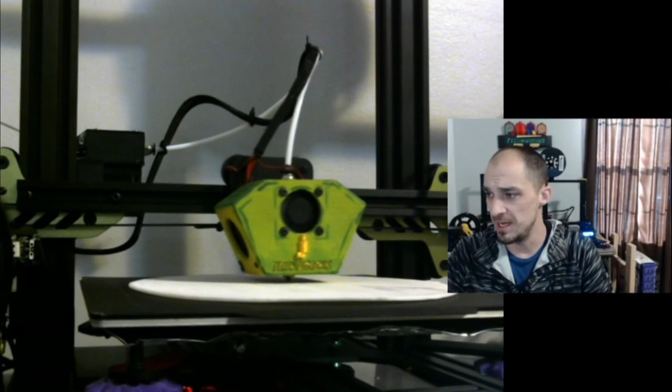As you can see, it is going back and forth. The bed is moving front to back. Then this bar that the X gantry sits on going across will raise up and down, and that is your Z-axis. So 3 directions of motion, actually 6, because it goes both ways in most directions.

The build volume is what they refer to as the size of what your printer is capable of printing. Both of these will print 230 millimeters wide by 230 millimeters deep, which is about 9 inches, and they go about 250 millimeters high.

But first, before you can print a model, you have to either find a model or make a model. There are several places online where you can procure pre-made, ready-to-go models, and I will show you that in a few minutes.

But for now, I want to show you a couple of programs that are free to use to make your own model. The first of those is going to be Blender.

Blender is 3D animation software. It can be used to make any model that you choose. It's got a very good sculpting engine, so you can go ahead and brush and sculpt the object that you want from primitive objects.

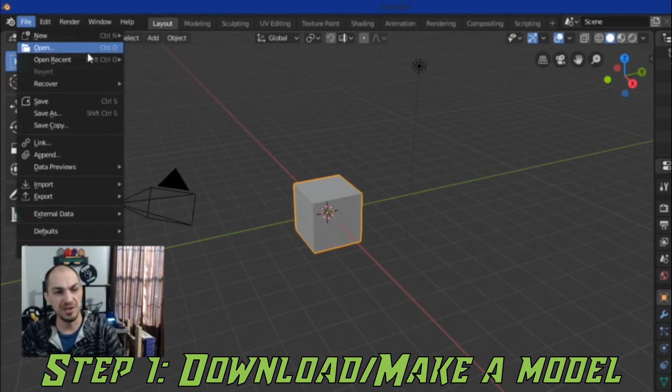I'm going to open something that I sculpted here, and we'll just take a look at it. Now, this is for a game, and as you can see, it is untextured. It's still in the sculpture texture here. The material is just kind of plain, but this could easily be 3D printed.

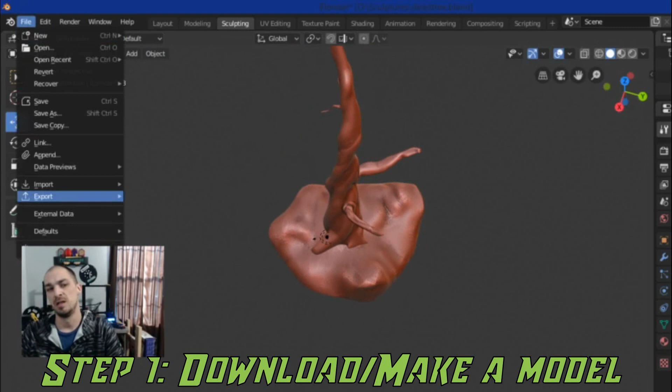The way that I would 3D print a model from Blender would be to go to File, then Export, then STL. I can then save it under whatever name I want in whatever folder I want, and then retrieve it later in my slicer. I'm not going to save this one.

I have plenty of STLs we can import when we get to the slicing stage. But remember that STL is your main file type for 3D printing.

The next step of the process is slicing, and a slicer will take the STL and turn it into something called G-code, which is what your printer actually reads and will tell your printer what to print.

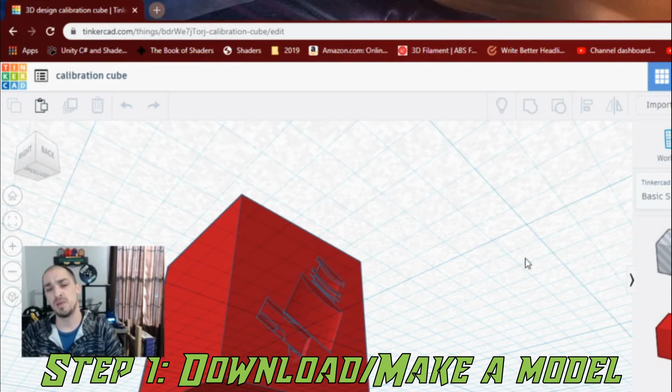Other free programs for making models: this is tinkercad.com, an online app. It works really well for a CAD program. It doesn't really have a sculpt function, so it's hard to make organic looking creations in Tinkercad.

But anything that is mechanical or has to have fitting parts or part accuracy, this is a great little program for it, and it is a great place to start.

If you try Tinkercad and decide that you like this CAD program and want to go in more of a CAD direction instead of a sculpting direction, a couple other programs I can recommend are Fusion 360, which you can get a free license for as long as you're not using it commercially. That also needs an online connection to work, but it works amazingly.

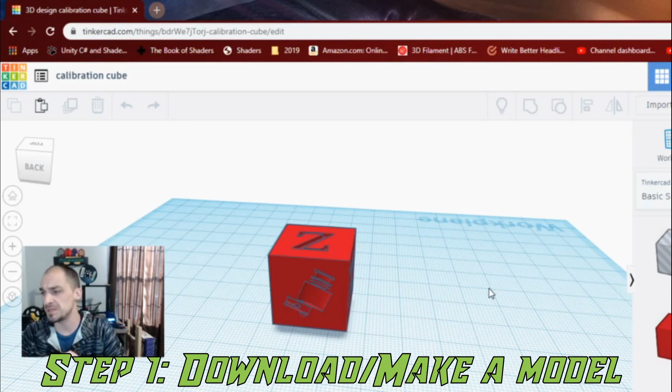Or you have SolidWorks. SolidWorks is not free. You do have to pay for it, but it does run offline, and it is also a very strong piece of software.

On the other hand, we have pre-made models that you can download. This is definitely not the only site, and it crashes a lot. There are a lot of complaints about this site, but it is one of the largest repositories of 3D models, and I can tell you for me, it works 95% of the time. I haven't really had any issues with it. It is probably the most recommended model repository at the moment, although there are a few that are gaining popularity, and hopefully will pass it up this year.

When you download it, it will come with a zipped up file that has your model in it, and it will come with the STL file zipped in that file. Usually there is a README file as well that will tell you what parameters to set in your slicer to get an accurate print, such as layer height and whether or not you should use support.

So I do have a couple things downloaded from Thingiverse, and this is the route that we're going to go because it does have that README file, and I'm going to explain that to you as we walk through the slicer. But first, let's go over a couple of slicer options because there are quite a few, and some of them stand out more than others.

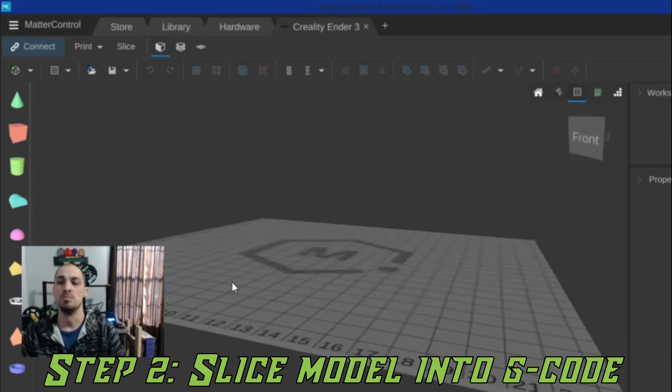The first one I want to show you is going to be my personal favorite. This one doesn't get used as much as two of the others I will show you in a little bit, but it is an awesome slicer. All of these slicers are free, by the way.

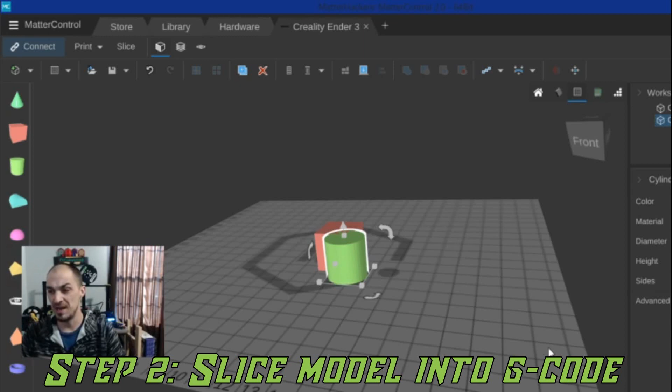So this is MatterControl. This is my favorite. I like it a lot. It works really well. It has this Tinkercad-like building interface in it where you can also build models right in here. So it's a great place to start. Unfortunately, there are more popular slicers and therefore easier to use and better supported slicers. So we will check out a couple of those.

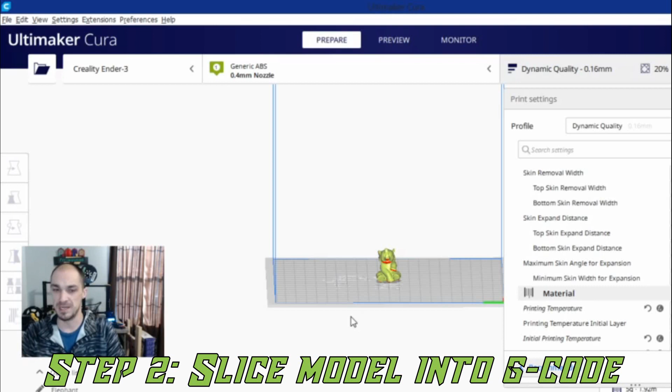Now this is Cura. This is probably one of the two most popular slicers that you can get. It works very well. They're constantly updating it, although when they put out updates, they do tend to have a couple bugs in them, which they fix in the next update. So it's kind of good that they roll through updates pretty quickly. But you can see it looks fairly similar to the Creality slicer. The only difference being the Creality slicer is built on an older version of this Cura engine.

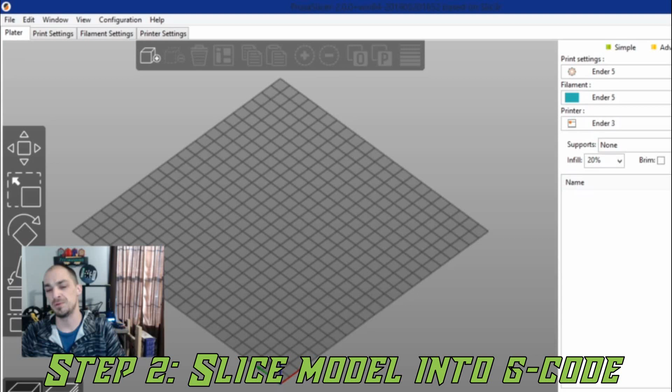So we'll get back to Cura in just a second because this is the slicer we're going to be using. But I wanted to show you the other most popular slicer, and that is Prusa Slicer. This one is a very nice slicer as well. It is made specifically for Prusa printers, but you can use it with pretty much any FDM machine.

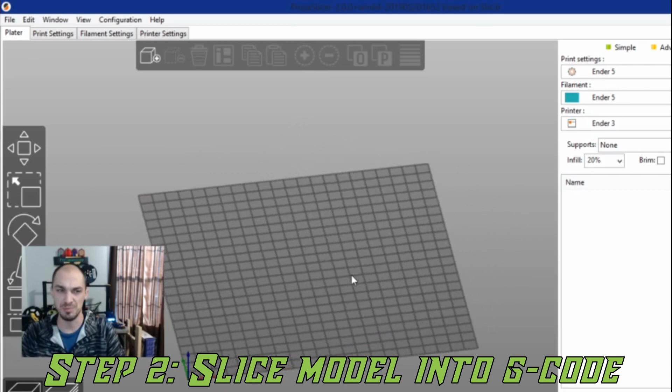And the people that use this swear by it. I have used it a couple times. I've had some pretty good luck. There were some things I didn't like about it. I keep it around because I like to keep things updated and review new features, but it is not my go-to slicer. This is the one that came with my newest printer, the Tevo Tarantula Pro.

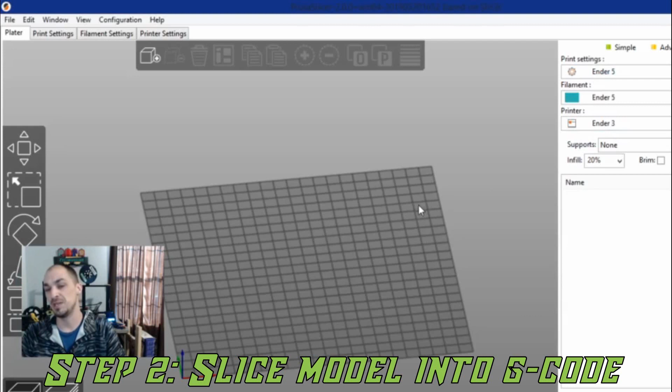Now, these are all slicers that are installed on my computer. So I can slice with Cura, or Slic3r Prusa Edition. Now the reason there's two of these is because this slicer I showed you is actually a different version of a slicer that's just called Slic3r. They branched off. They've basically made their own development of it. They have their own version that they update, and it is different now, but it is based on that same slicer engine. Those three being the main three engines that run pretty much all the slicers.

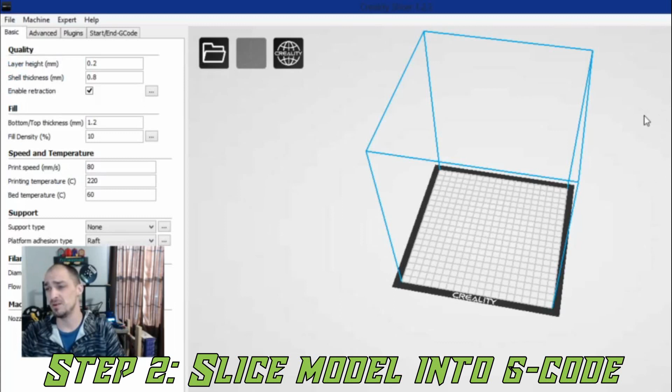There's really no point in using a slicer like Creality slicer, as it's basically a port of Cura and doesn't have all of the stuff that Cura has, so we can close that.

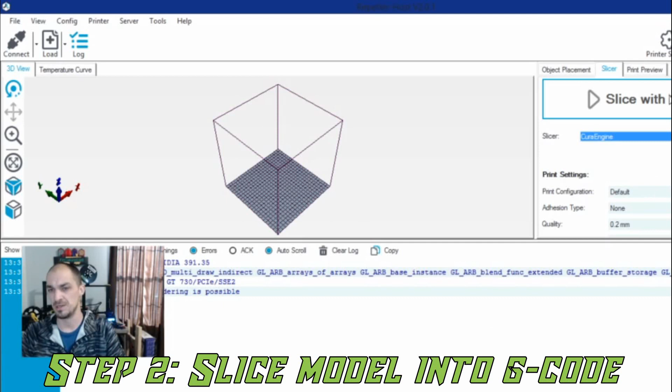Repetier is nice as well if you want to try slicing with the Cura engine or the Prusa engine and compare the models, but this one also is kind of pointless because in here you don't have nearly the amount of settings that you have if you were to just use either Cura or Prusa slicer. So we're going to get more functionality by using one or the other.

Although I will say, the one thing I like the most about this is the manual controls. You can go in here, and most slicers have this, but I just like the way this one's set up, because in Cura, if you send a G-code command, you don't get a return. But here you'll get a return. It'll show up down here. So we can close that as well.

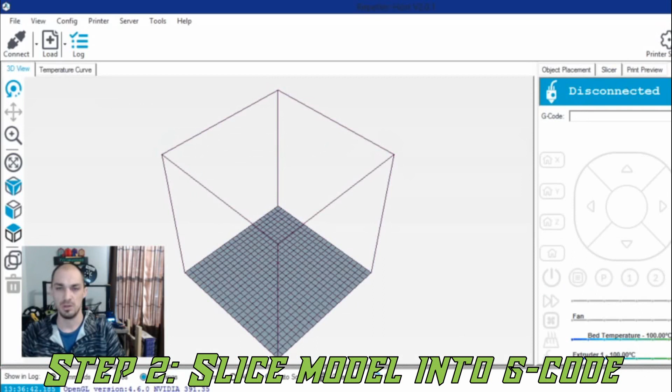And we're not going to be using Prusa slicer either, so we'll close that. I'm going to bring Matter Control up one more time to close, just so I'm not running 20 different slicers. We are going to be using Cura here.

And I have one more free software I want to show you while we were talking about connecting to the printer. This is Pronterface. This program connects directly to your printer, just like the other ones do. But it is a really robust program for sending commands to and from your printer. We'll get into this more in depth later. You don't need to send commands to your printer in most cases, but it's something you use for adjusting settings in the firmware and things like that when you get into more advanced use.

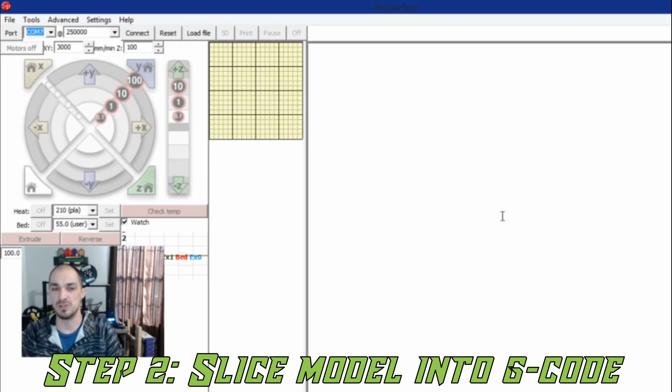The other thing is this slicer here. There is an actual slicer. I can pull a model in, and if I go to slice it, it will open Slic3r, not Prusa Slicer, the original Slic3r, the latest version of it. So it's kind of like Prusa Slicer, but a different branch. Anyway,

That's a lot to throw at you. The reason we're coming back to Cura is because, like I said, Cura is probably the most popular slicer. It is one of the simplest to use. It is the most often updated and has a very good community support system, as well as a lot of online resources for how to use it.

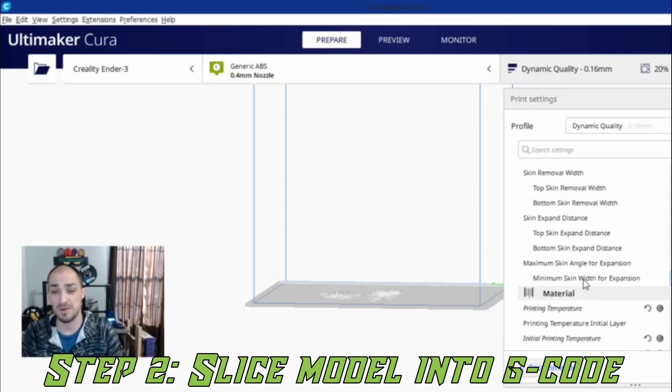But for now, we're going to move on and show you how to import your first model.

And there we go. It's kind of nice. You can just drag and drop. So your screen should look something like this. If you don't have Cura set up yet, I do have a tutorial on how to set it up. Go ahead and check that out and come back to finish this video.

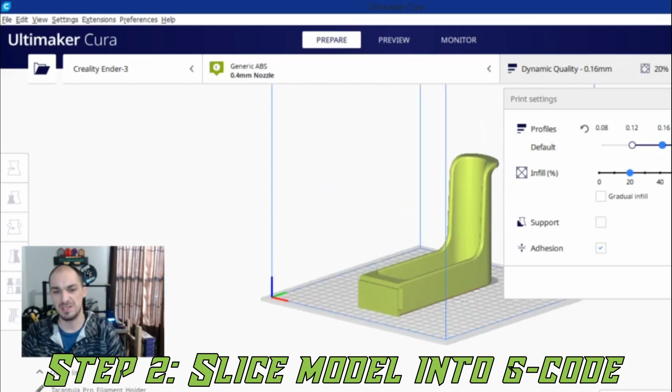But if you're just watching this as far as seeing whether or not you want to get into 3D printing, don't let me overcomplicate things. This is a lot simpler than it looks. I basically just drag and drop. As you can see, it's got this red spot here. That's going to want support. So I would click the support button.

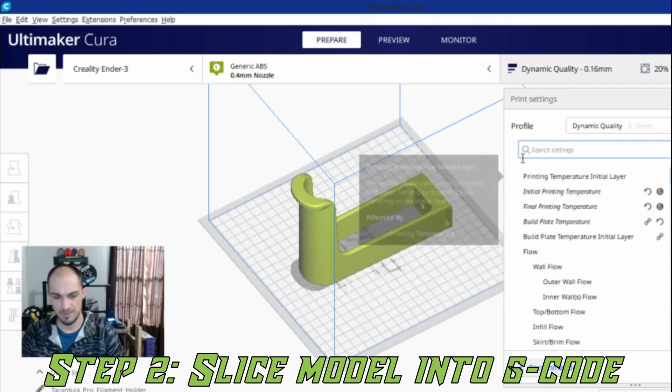You can see I have a few of my settings set here. And I'm actually going to go into my custom settings and do a little moving of things around. I know I had been printing at a different temperature and I want to change that. There we go, we're going to do 220.

And we're going to change the adhesion as well. If you're not familiar with adhesion, like I said, it's in that Cura video for how to set up Cura. We'll worry about that another time, but we are going to be using the brim.

And now we can go ahead and hit slice. Now the program is going to take care of all the hard work of going through and basically making a connect-the-dot map of the individual layers of this model. That's why it's called slicing. It's going to slice it into flat sheets, and then make the machine code to tell the printer where to connect those dots in each layer. Then it raises up to the next layer and puts down that layer, building the model this way. This is called fused deposition modeling—depositing and fusing those deposits into a model. That's where it gets its name.

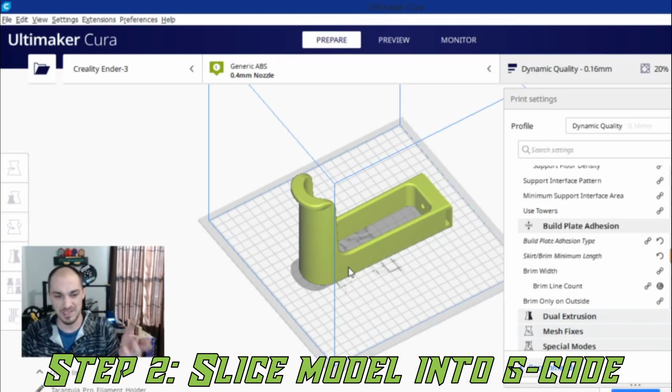So slicing is taking a little bit longer than it normally does. This is a decent sized model, so we're not going to rush it. Once this part of the process is complete, you can save your file, and it's no longer an STL file—it's a G-code file. That G-code file can either be sent directly from your slicer to the printer, or stored on an SD or micro SD card, depending on which printer you have, and inserted into the slot. Once you've inserted the card, you can select that model and print it from the printer, and I'll show you how to do that as soon as we're done slicing here.

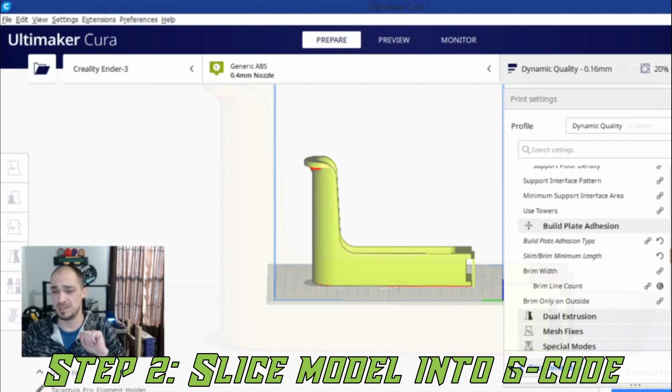Now that I've got my model all sliced up here, I'm going to save it to file, but let's go ahead and check out the preview mode.

This is basically going to show you—if I go all the way down to the bottom, it's going to show you this is the first layer, okay? Now the first layer is basically your most important layer. If this adheres to the bed and goes down well, you're going to have a decent print. If it doesn't stick, the rest of your model is not going to come out.

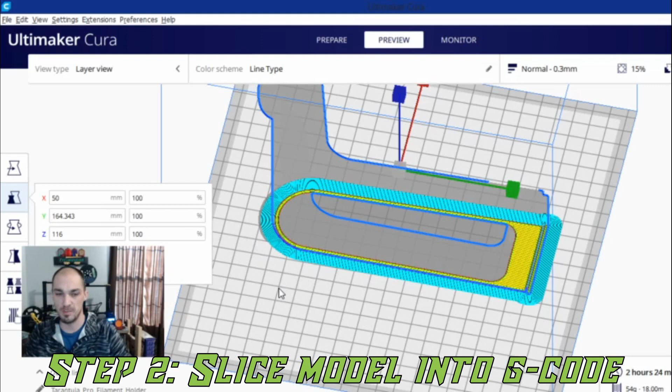As I said though, you can see here a better idea of what I mean by layers. It's breaking it down into each layer, and each layer has a machine path that tells the head of the printer to run. So as it's printing my brim here, this is the path it's putting into G-code to send to the machine. You can see it just kind of goes around and fills out the dots and builds the model up from there. So we'll go ahead and save this and jump over to the printer.

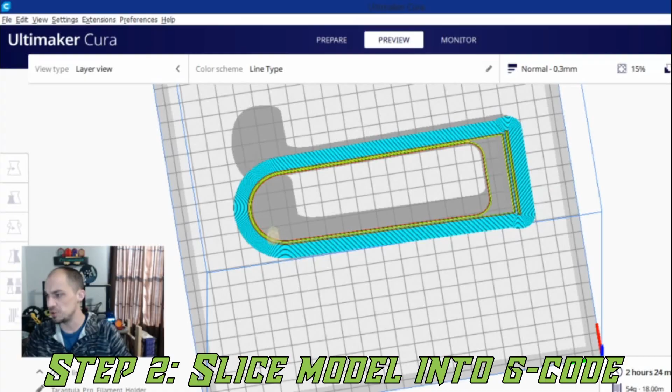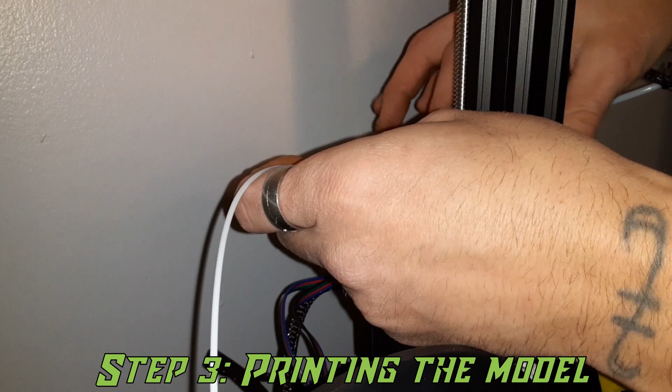Alright, so I'm getting ready to print my first model. I have my spool of filament here, and I'm going to go ahead and just clip the end of it at about a 45-degree angle there. Then there's a little guide hole in the back of the extruder, and I'm going to feed it in there and depress the lever to give me enough room to slide through into the Bowden tube. You're going to hold the lever down, feed as much filament into the Bowden tube as you can. You'll start to feel resistance once it reaches the end, and you are loaded and ready to go.

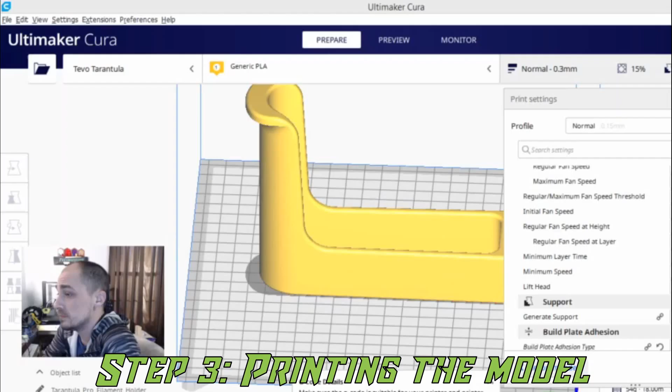Now that I've got my file saved, I'm going to head over to my printer here. As you can see, I have my SD card here. This is a full-size SD card. It's going to go in this slot right here.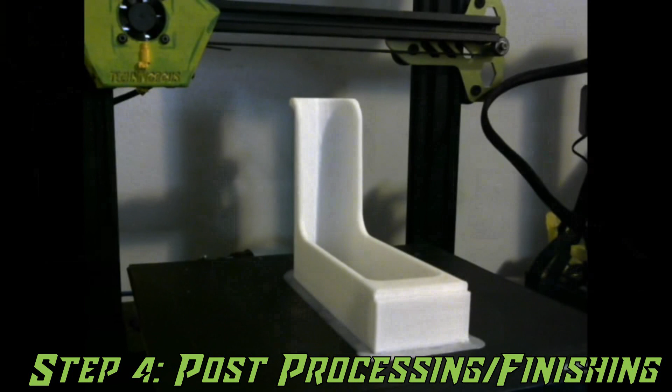Alright, so here we have our finished model. I'm going to go ahead and gently remove it from the build plate. I have a magnetic bed, so I can simply lift my magnet up, and I'll show you that now. Then peel it away from the bottom of the brim and let it slap back down there. And here you see I have the completed spool holder.

Now, the last step to this process is the post-processing and finishing process. There are a couple of steps to that process.

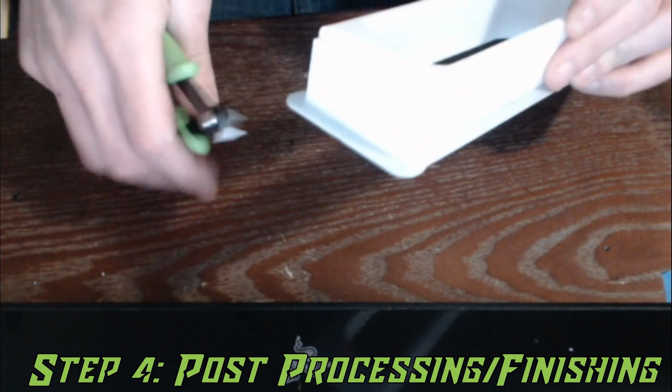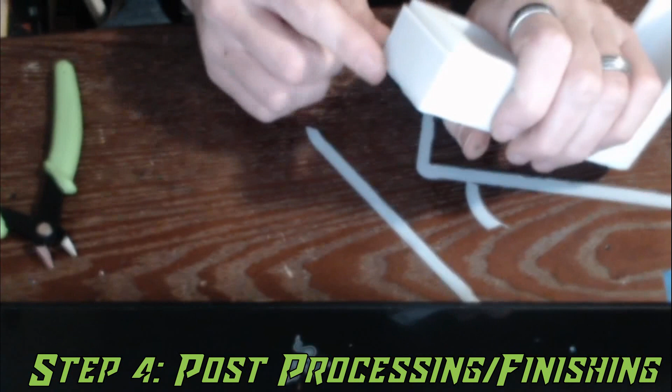I'm going to get out my clippers, and I'm basically going to clip into the brim, and then press and peel it downward and away from the model. This is the easiest way to remove it. You need to be careful when removing brims and supports and things like that, because sometimes they can have sharp edges, so it's easy to cut yourself if you're not paying attention. If you're careful, you shouldn't have any problems, but there's no reason to run through it all hastily.

I am going to speed this up on the camera here. This is called deburring, where I'm taking the jagged edges off of the corners. There are special tools they make for this. I highly recommend checking out Chuck Hellebuyck's Filament Friday tool, which is a specialized tool for removing burrs like that.

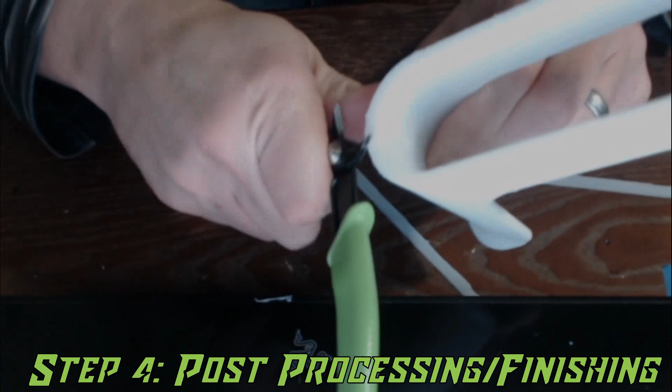That was some support I clipped off there. I found those instructions in the pictures that came with the download of the model, and that's basically it for the first step. I've cleaned up most of the corners, done a little more deburring and scraping, and now we're going to move on to the second part, which is a light sanding.

Now I have a medium grade sandpaper here, and I'm simply going to rub it in circles and sand until I have a fairly smooth surface.

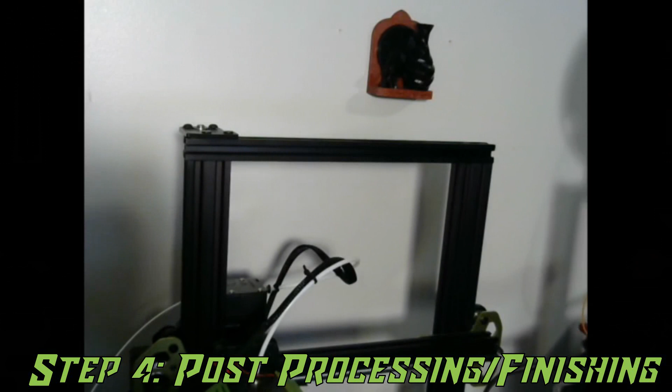Now, the reason I'm using white here is because it's a printer's trick that white filament really easily hides layer lines. So this model is not quite as nice as it looks. I will tell you, white does hide the layer lines really easily, but depending on what kind of printer you have, sometimes white can be a little difficult to print with. But it came out looking all right.

That's basically it for the process of making something with a 3D printer. Now I'm going to use my handy V-slot locking nut to mount the spool and move it up to where it needs to be so it will flow easily into the extruder without causing any jams or problems.

So this isn't really part of the printing process, but I guess I'll show you how to do it anyway. Basically, I slid the lock nut in there, and then I realized it would be easier to pre-fasten it. So we're going to take the time to put the bolt through here. As you can see, it just slides in this little hole here.

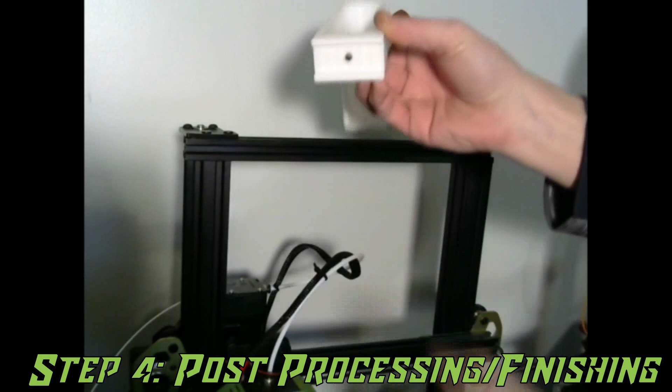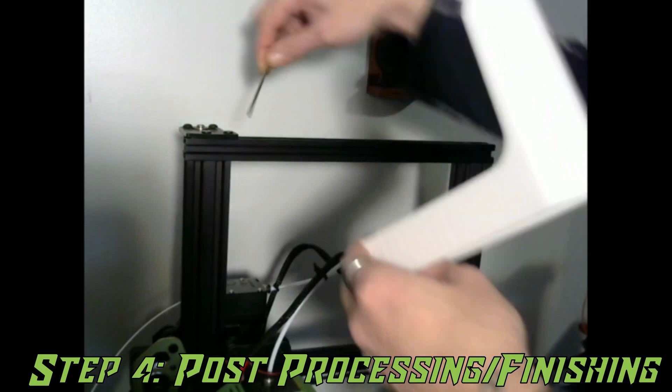Then I am going to fasten the locking nut to that. I'm also going to drop it after I think I have it fastened, but let me show you how you want to align a nut like this if you're trying to put it into a slot while it's already on the bolt. You want it to be horizontal with the bar so the thin part slides into the V slot. And there it went, I dropped it right in the slot.

This is basically the gist of it. So it's a 4-step process. You have to obtain a model, slice that model, print that model, and then clean that model up.

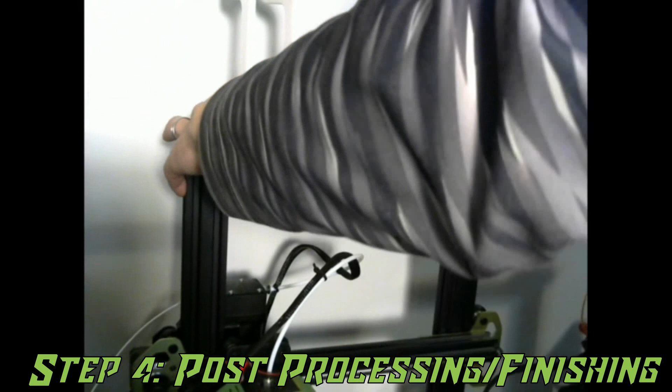All in all, this process for making this spool holder was a 2-hour print. It probably took me about 3 to 3.5 hours from start to finish. And I condensed that down into this video, just about 20 minutes, which isn't too bad.

So I hope this has been helpful for you.

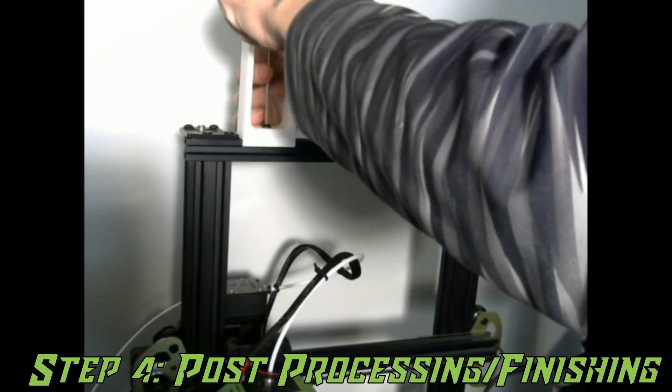I'm going to test out my new spool holder by running some prints.